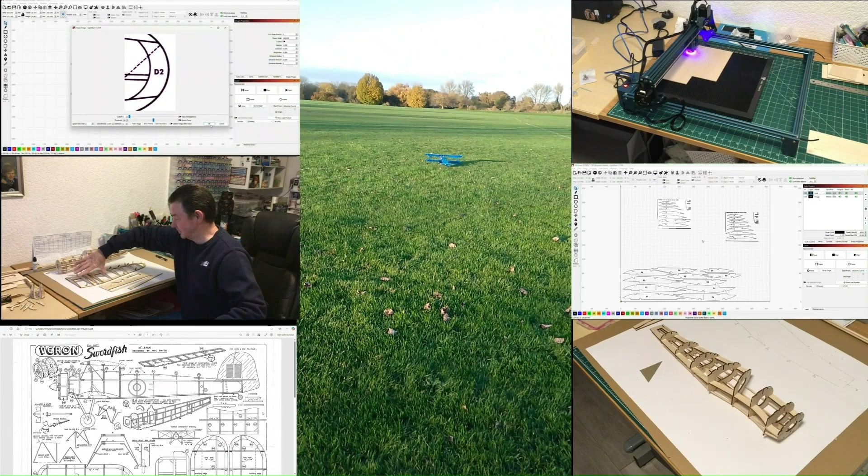Okay, so this is the plan of the Gypsy, the full plan, and you can see the wing here, and that's what we're going to be concentrating on today. Now, in the previous video in this series, we produced all the components for the fuselage, and the majority of those are here on this 1/8 balsa sheet layout. So coming away from that, I've got the formers on a sheet that is 3mm ply.

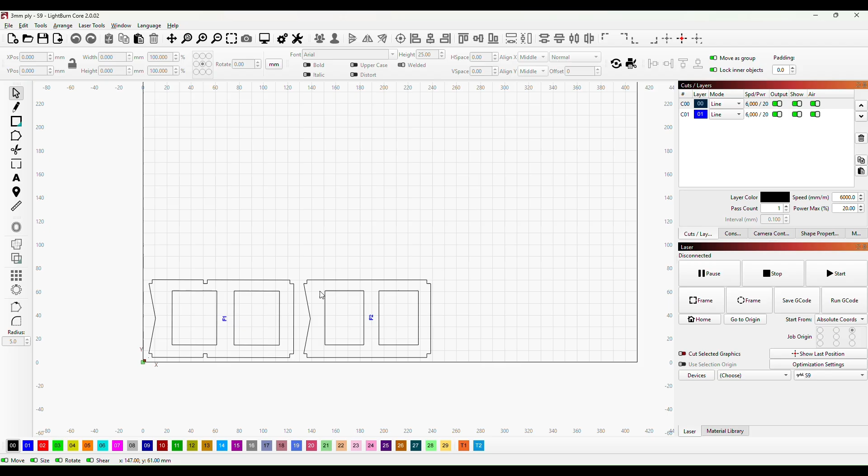Because we're converting to radio control, there'll be a lot of weight inside the aeroplane that was never designed to be in there originally when it was rubber powered, and so I'm making the main formers for the body out of 3mm ply. So if we go back to the main plan,

what we've got is this is the plan, and just to put it into perspective, this square here is the working area for the Sculpfun S9, and I've set it as 400 by 420 millimeters, so it gives you an idea of the size and the scale of the plan that we're working with. Now, one thing to point out is the top of the cabin here, where the wing will sit. You can see that that's flat.

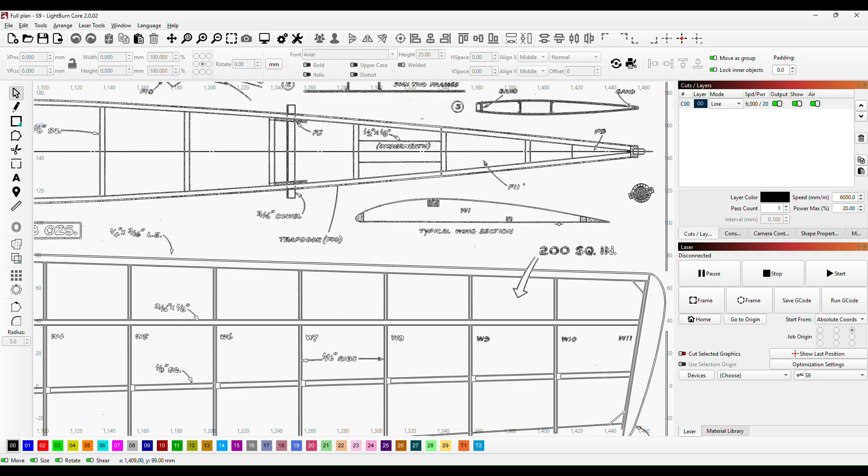Okay, and over here we have a typical wing section, which is the typical wing rib, and you can see that the bottom of that is flat as well. So the wing we're going to be making has got the aerofoil, but with a flat bottom.

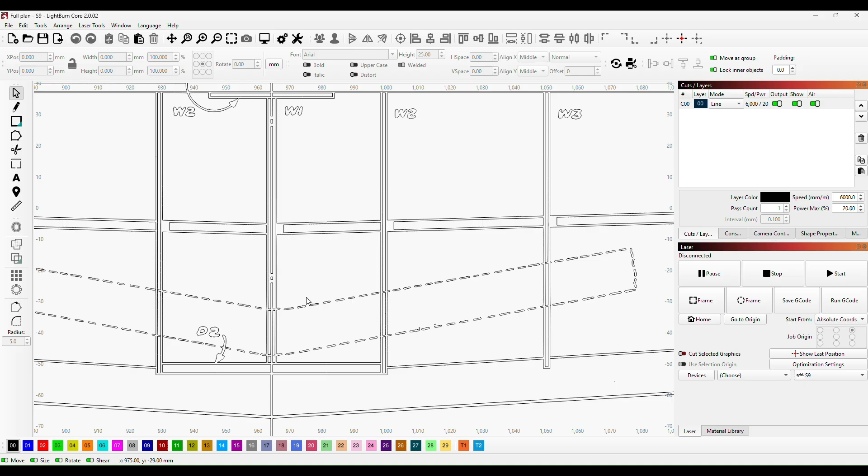So what I'm going to do is use this example here to produce the center two ribs, because you can see there's a rib on either wing, and they'll both be set at a slight angle, and then when they're fastened together, that will provide the dihedral for the center of the wing, and that dihedral is shown with this dotted outline here. So that's the angle that the wing will be set at in the center.

So I'll start by just making the outline of this rib, and I'll make it the right size for the centerpiece, and then we'll be able to work with that rib to make the remaining ribs. And bear in mind, these taper down, so unfortunately on this particular model we're going to have to alter every single rib all the way along the entire length of the wing, but I'll show you how we do that. Okay, so to make this first one, I want to use a line tool.

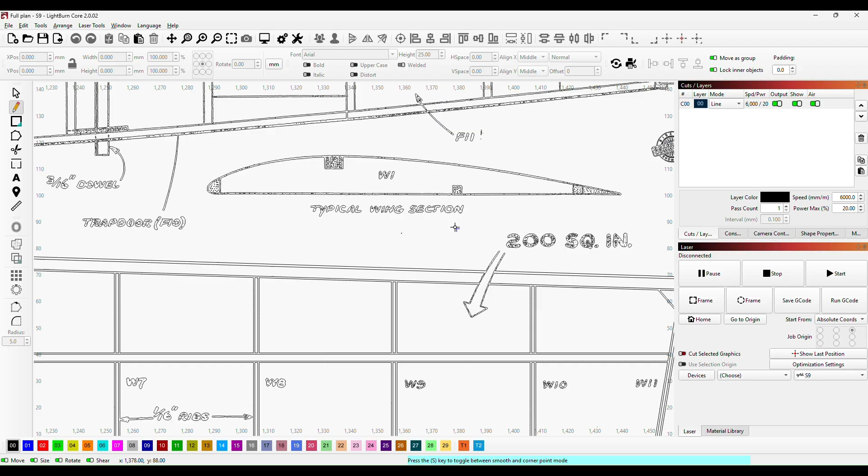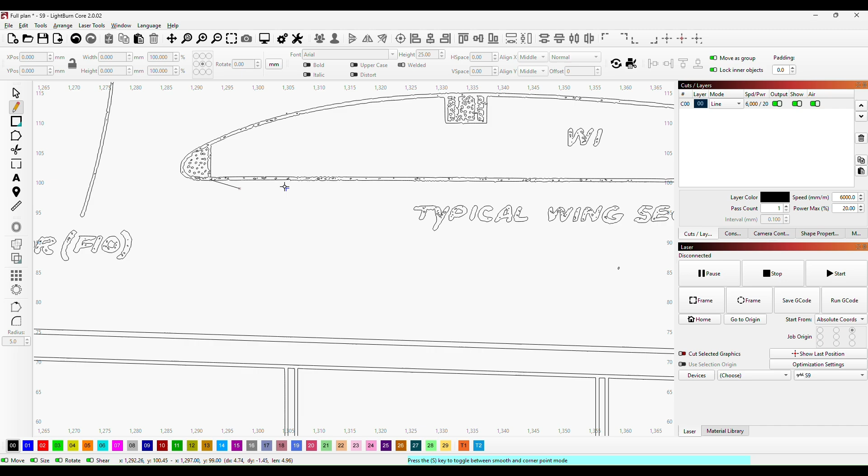I'm not going to trace this rib, because you can see that the outline, when it was originally penned, is very rough. So rather than just copy the outline of the rib, what I'm going to do is draw my way around it. Just like this. I want to come to the inside on this particular one, because this is going to have the dihedral in it, and then coming around the top, all I'm going to do is click in several places around that shape there.

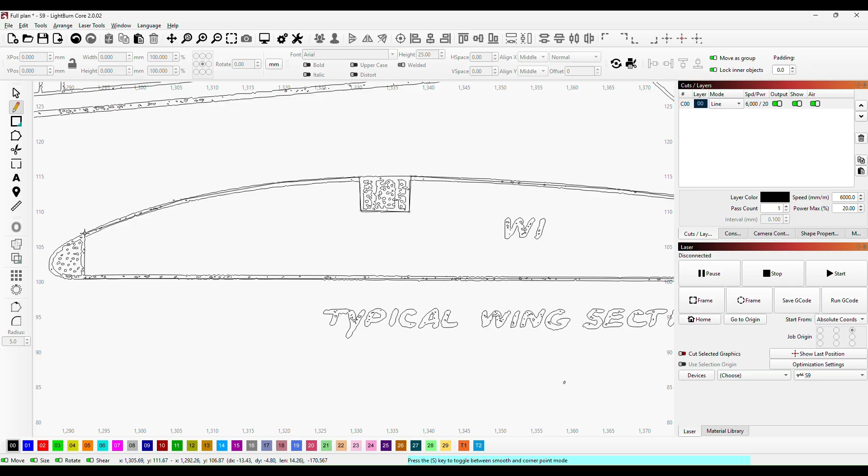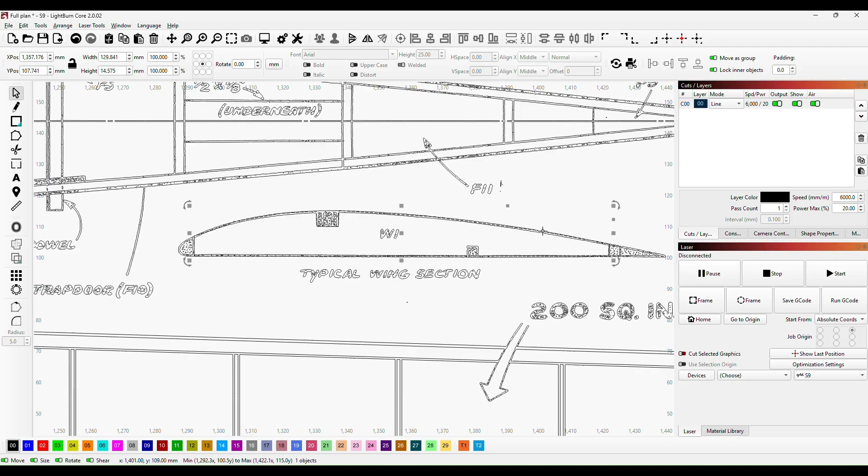Okay, so that's that. Now I've gone straight across this one, but because we've got a flat surface on the bottom there, I thought it would be quite simple for us to insert that later, so we won't worry too much about that. What I'm going to do is I'm just going to change the layer there so that that's a different colour, so that we can see it against the background of the rib that we've got.

If I go to nodes, I can now start to make sure that this shape is absolutely right. So I want that node to be on the outer line. That node is on the outer line. Okay, so if I hover over each of these nodes, because you can see that we don't follow the line properly, so if I hover over this one and press S, you can see that that turns into what's called a smooth curve node, and this corner node here is still set at the original angle pointing straight up.

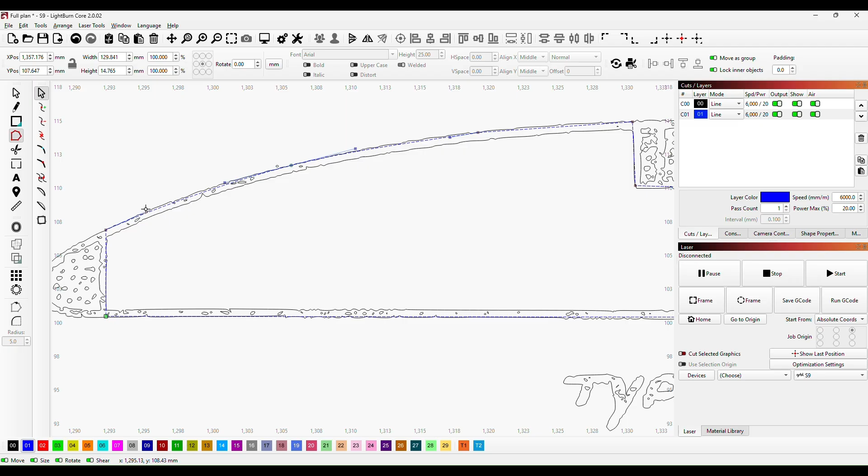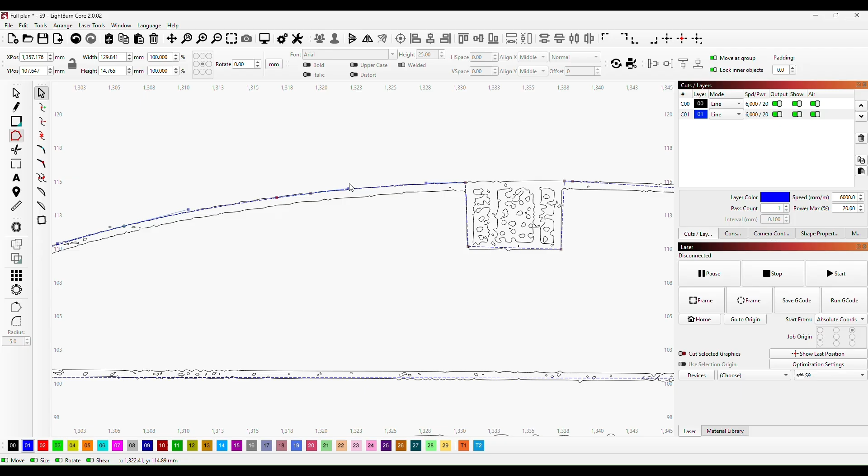So if I just grab this little tab here, what you can see is I can get that to follow that curve around, and then same with this one. Now if I just grab that and drag it out, that will bring it to the line. Okay, so you can see how we're following that line now on there. So if I come to this side and do exactly the same, create a smooth curve node there, and just bring this tab up a little, convert this one to a smooth curve node, and I think that's round about right.

You can see there's a little bit of a wobble on the original drawing here, but I'm not going to alter that because the bottom of our line there is dead straight, dead flat, and the intention on this particular model is that it is flat so that it can sit on the cabin.

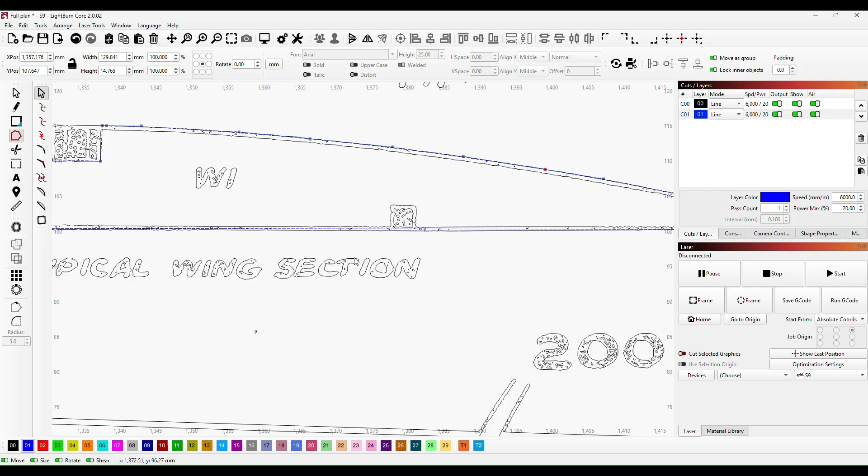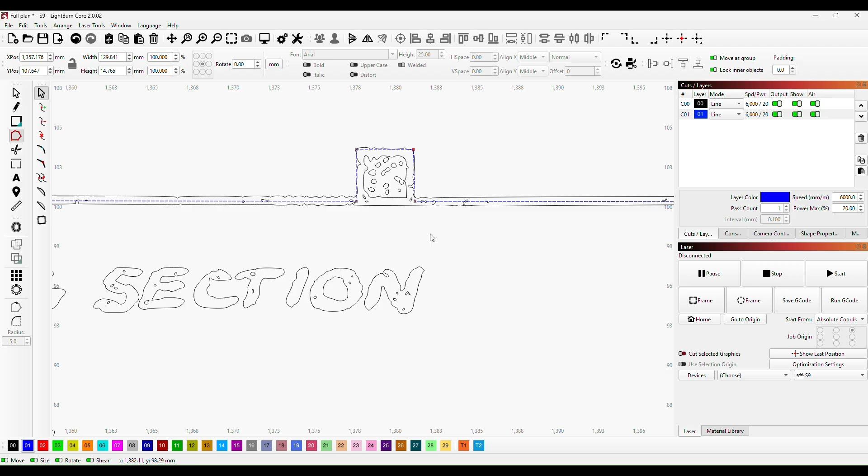What I want to do now is insert this shape here. So all I'm going to do is hover over the line there and press I, and that will insert a node. Hover over the line here, press I, and so I've now got a node at each corner there. Go anywhere in the middle, press I, and bring that up to there. Anywhere on that line and press I, and bring that one to there. I've now got that cut into the right place.

So what I'll do now is I'll bring this across to the main work area for the laser, and we'll carry on working on it. But before I do that, I just want to point out that the end of this rib here has got a flat end, because what the designer wanted when this was first designed, which was in 1947, he wanted this to be a flat piece sanded down and made into a rounded leading edge.

What you'll find on modern designs now is that this will be a square, and the end will be a point which you can easily sand, and you'll have what's like a bird's mouth in the end of this rib. And what I'm going to do is I'm going to put a bird's mouth into this rib, so that we can accommodate the modern way of doing this by having a piece of square balsa running along the front of the wing.

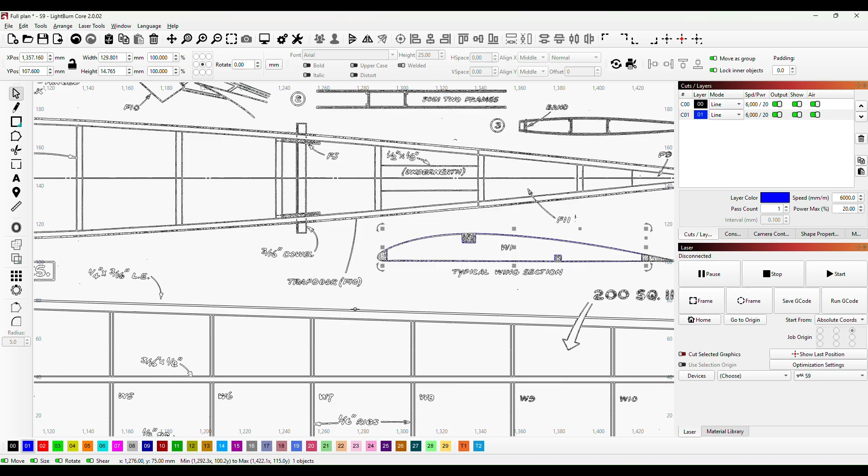So what I'm going to do is just quickly measure this, and what we'll find is this is 4.86 millimeters. So I'm going to take this over to the workspace, just like that, and then I'll come off this layer now and I'll make it into our cutting layer, which is 00.

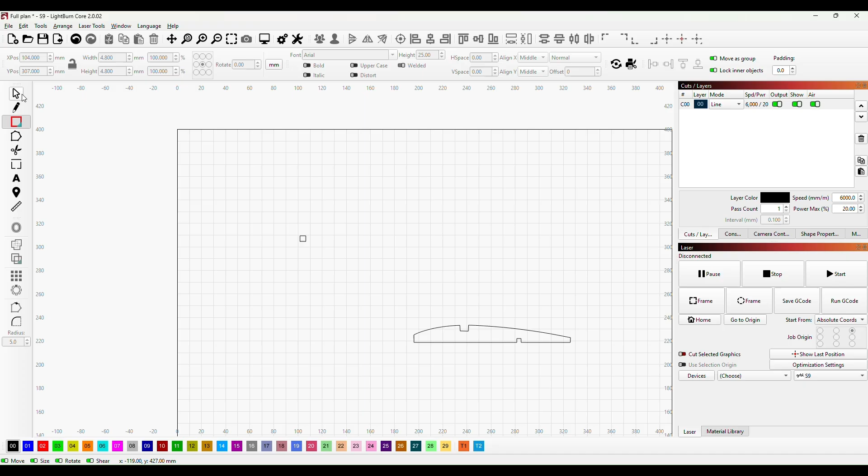Now instead of having that flat piece on the end of all of the ribs with the rounded leading edge, I'm going to put a piece of balsa in, which is square in section, with the point leading forward, and I'll show you what I mean. So if I make a square here, which would represent a cross section of a piece of balsa, and I'm going to make that 4.8 millimeters square, just by altering these numbers up here, and then that would be representative of a 3/16 piece of balsa coming right across the front of the aeroplane.

Now if I turn that to around 45 degrees, we can now align that and make sure that that's exactly level by going to nodes, hovering over one of the edges and pressing A, and that then will make sure that that is now level through those points.

Because if you do that, when you go to nodes, hover over one of the edges and press A, it will go to the nearest, either horizontal, vertical, or at 45 degrees, whichever it's nearest to, it will snap to that. So if I then bring that over, and all I want to do is put the point of that into the center of our wing rib there, and then all I'm going to do is go back to nodes, and I'm just going to extend this along until it reaches the point there, and then I'm going to just adjust this slightly so it comes down to this point here.

And by doing that, what we'll do is we will key in a leading edge, and it will make the whole front edge of the wing much stronger. So with that in mind, if I just hover over, press I, that will insert a node, and I can bring that to that point there. So the bottom will remain flat. On the top, if I insert another node here, and then what we need to do is just bring that to the edge, and then if I just bring these nodes out until we get a nice sensible looking shape, just like that.

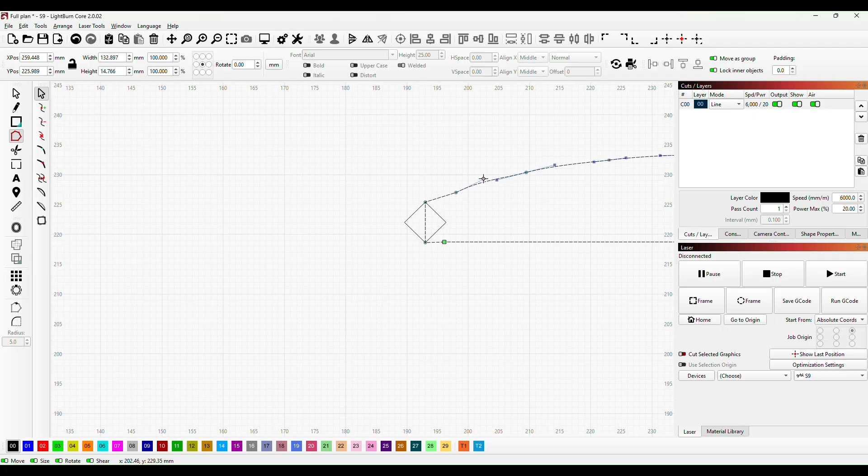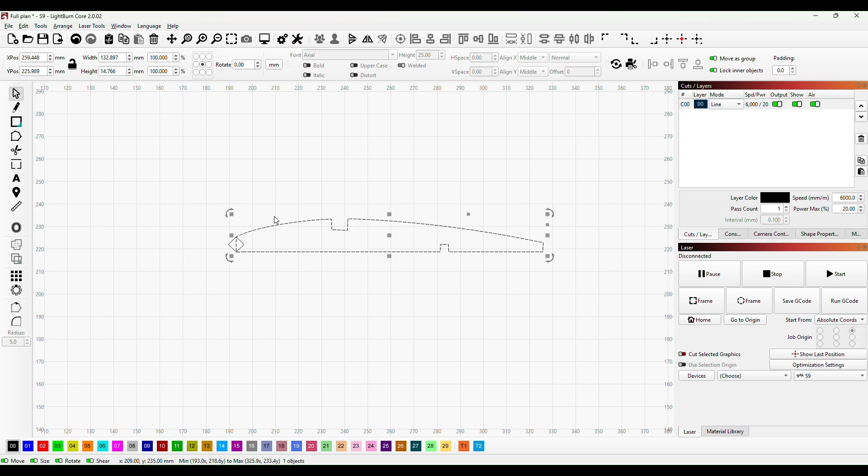We just need a little more there. If I select both of these nodes and then press Control and Shift, I can just raise them up slightly until we get a nicer shape there. Let's just take a look at that and see what that looks like. Okay, not too bad. That looks quite nice. So all we've done is we've strengthened this front end up a little bit. We're going to key in our leading edge, and that will make a much stronger wing. And the reason for doing this, of course, is because with us adding our electronics and converting it to radio, it will be a little heavier, so we want to just beef it up a little bit.

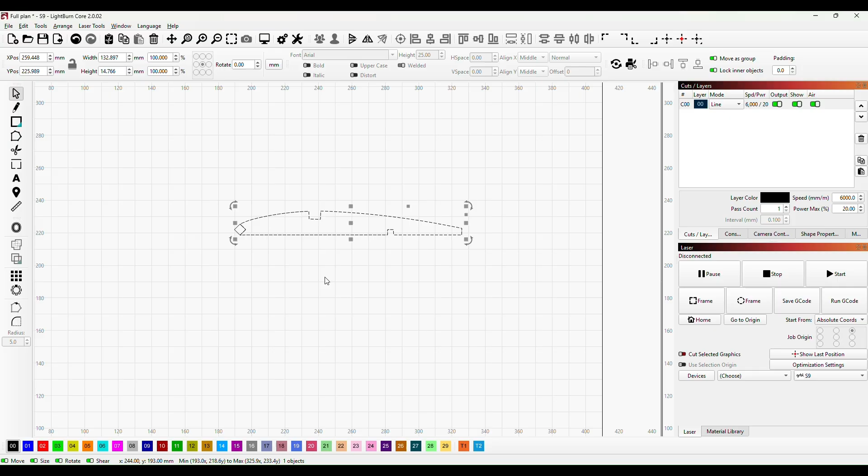Okay, so if I go back to nodes, and all I want to do is go into the center, anywhere in the middle, press I to insert a node and bring it back to that point there. Now what we'll be able to do with this is assemble this and just sand down the front, and that will give us a nice round leading edge. Okay, so the next thing to do with this rib, I'll just remove this. Next thing to do with this rib is to just check these two shapes.

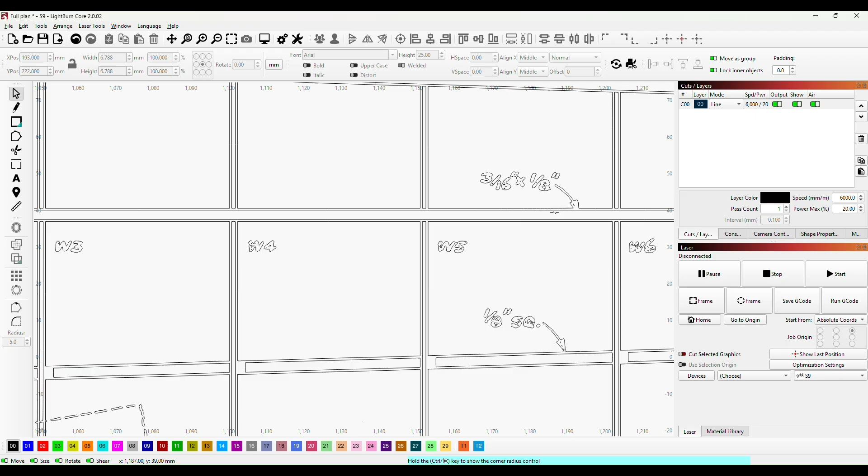Now if we come across and scroll right in, we can see that that is a 3/16 by 1/8 spar, so it's 1/8 across, or 3.2 millimeters across, and it's 4.8mm deep. Now these here, D1, so there's one of those either side, they are made of 1/16 balsa. We will make those out of 1/16 ply, just to give us a bit of extra strength in the middle. But we've got a 16th either side, so in essence we've got an 1/8 and a 16th and a 16th, so it's a quarter, which is going to be 6.4mm. So it's 6.4mm across by 4.8mm deep. That's what this shape here is.

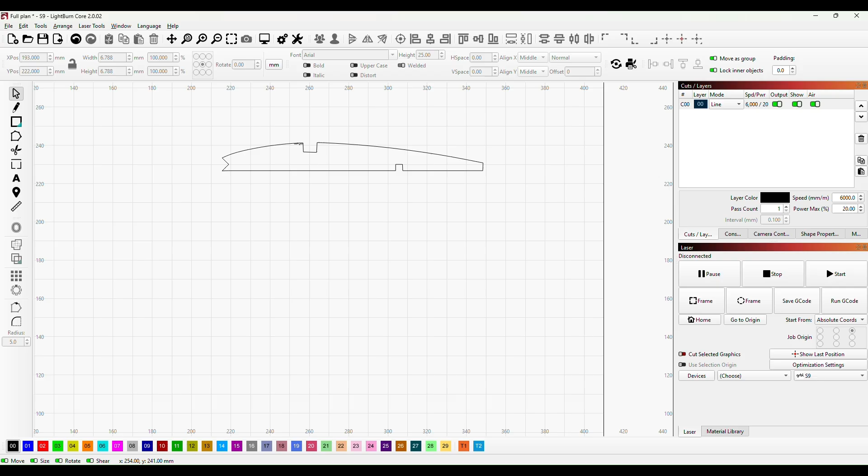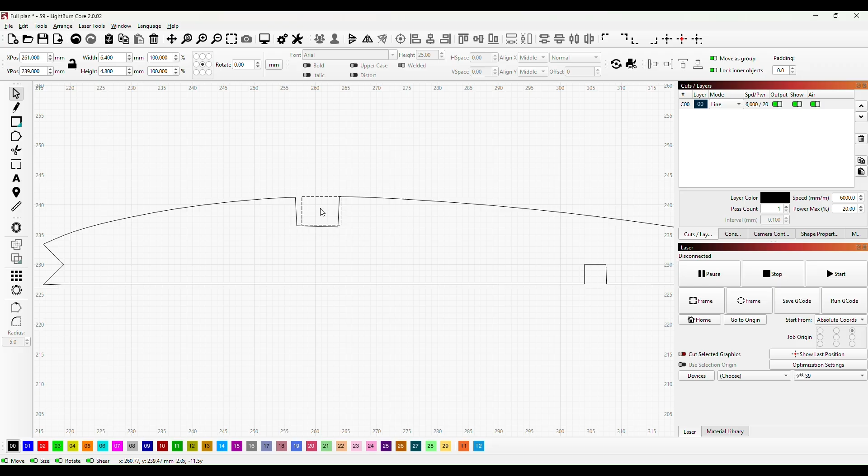So what I want to do, you can see just by looking that the way it was drawn out and the way we've copied the drawing isn't quite square and as we'd like it. So just make a quick shape, and I want that to be 6.4 wide and 4.8 deep. And then when I bring that down and center that, so if I press Control and Shift, I just want to get these two top corners in alignment here and centered on these two top corners.

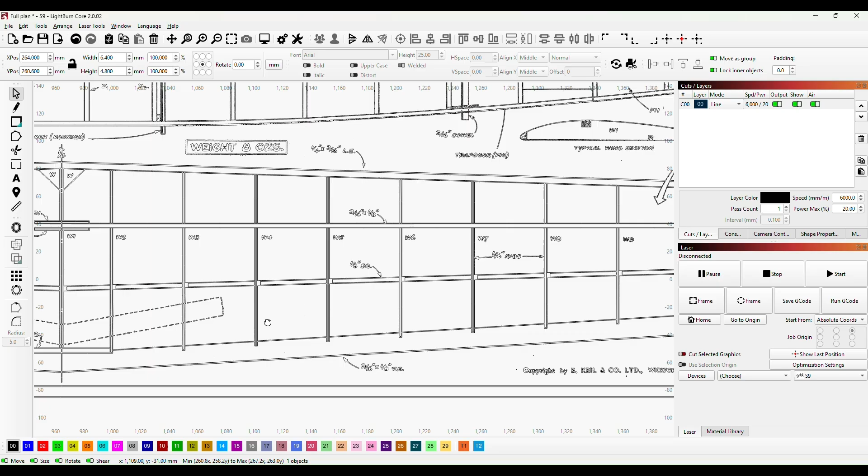And if we go back to our nodes, all I want to do is snap these into place, just like that, and then we know that that is going to fit absolutely perfectly when we make our components up, and it's now nice and square. So this one here is 1/8 balsa, that's spar, 1/8 square. So all we want to do is come back and we'll convert this now to 3.2 by 3.2.

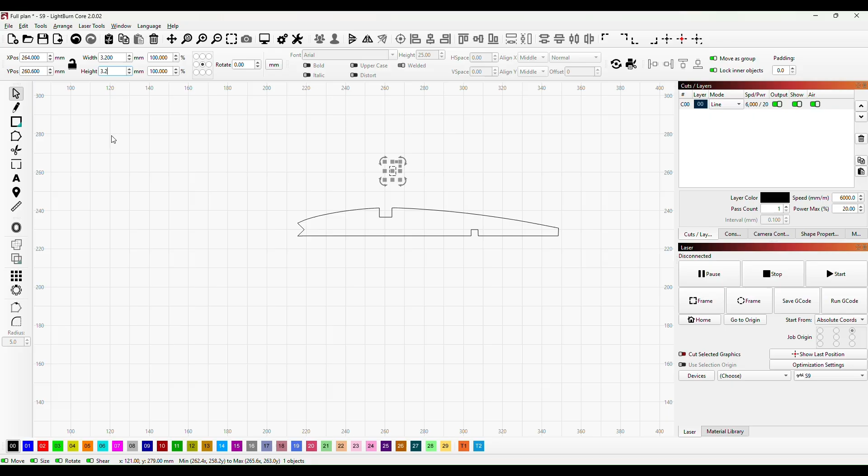Like such, and then we'll bring that down and then place it just as we did before. And all I want to do is get these two bottom corners in alignment with these two bottom corners and in the middle of them. So 1/10 of a millimetre is making a big move there.

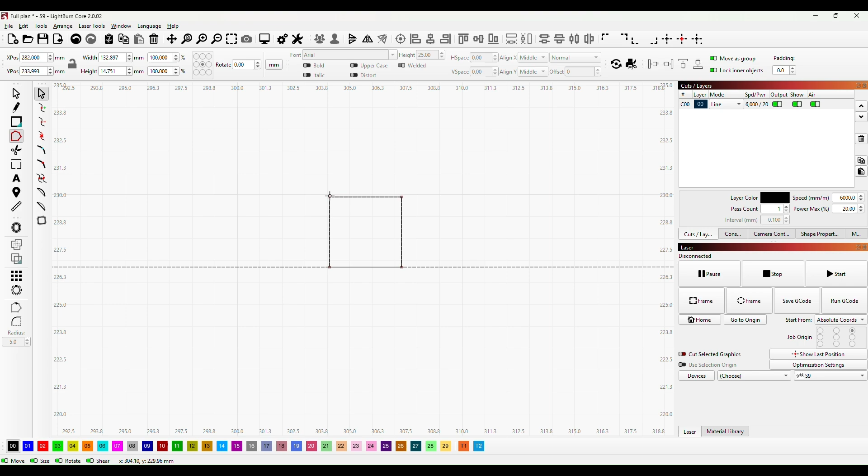But right, and so then back to nodes, and all I want to do is snap these nodes onto the corner, and you'll see that that is now a perfect fit. So with that done, we now know that this is perfect for that central rib on the wing. So I just turn that round,

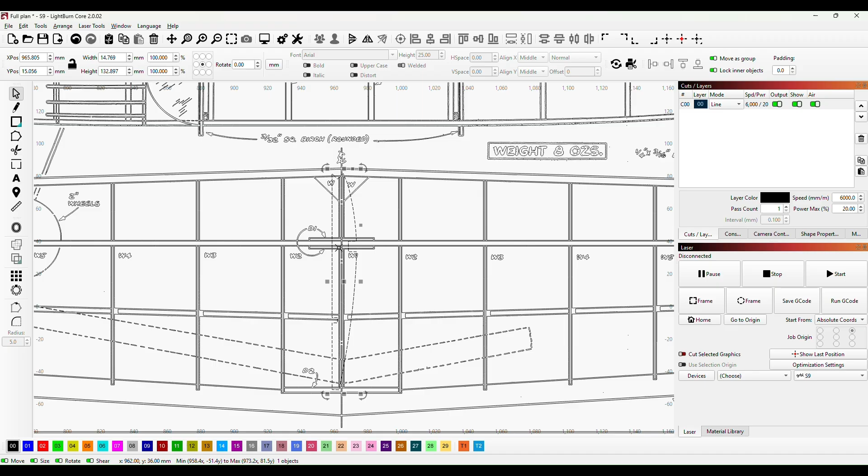and then what I'll do is I'll go to nodes, hover over this one here, and then I'll press A. So that's now upright. What I'll do is I'll just bring this across and we'll just check that it is going to be a good fit. And the way we'll do that is we'll get this bird's mouth here right on that leading edge. And we can see when we do that, that the bottom edge is in alignment with the bottom. Okay, so that's now the correct size and it's all lined up, everything there looks good with that rib.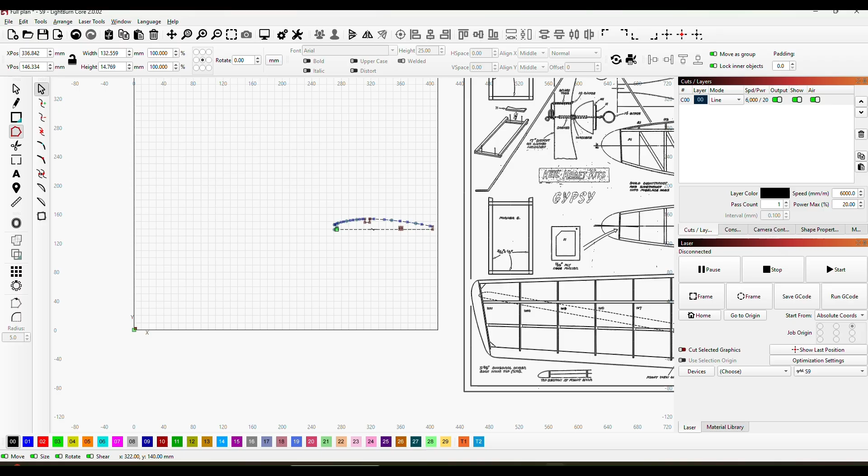The one thing that I do think we're missing here is that we've got a trailing edge here that's 9/16 by 1/8, and when we look at our rib, if we bring our rib over here and we'll turn it round and we'll just align that in the same way, we'll go to nodes, hover over this bottom line, press A, and now that's perfectly level.

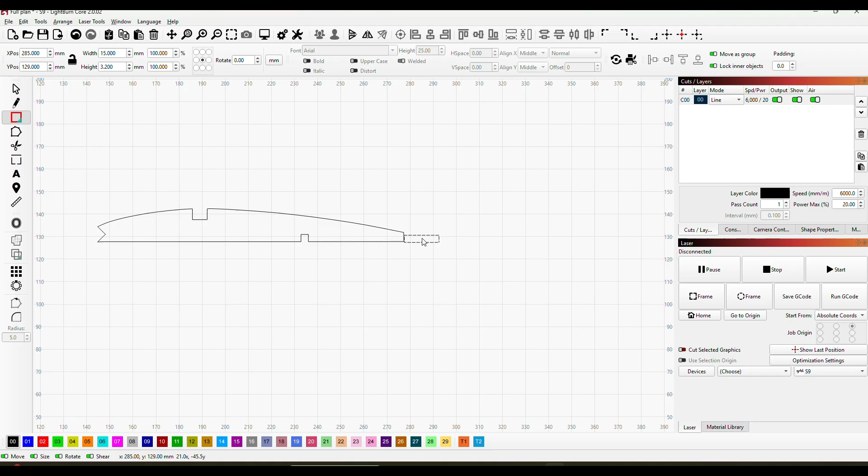The one thing I'm conscious of is that this back edge here is around 4mm high. If you have a look at that, that's 4.09mm. So our trailing edge is going to be 3.2 high, and close to 15mm long, or 15mm wide. And if we bring that to the back edge, which is where it would be, level with that bottom, and I'll just press Control and Shift and then use my arrow keys to bring that in and get that bottom edge perfectly lined up.

You can see that we've got a step here. So bearing in mind that there's going to be the dihedral shape in there as well, but nevertheless we've still got this step. So what I want to do with that is I want to go to nodes, and I'm going to insert a node right on that corner, and then insert another node. In fact, I could insert one down here, to be fair, and then it just makes it a bit easier. Just bring that along until that top shape looks nice and smooth, and then bring that up to there.

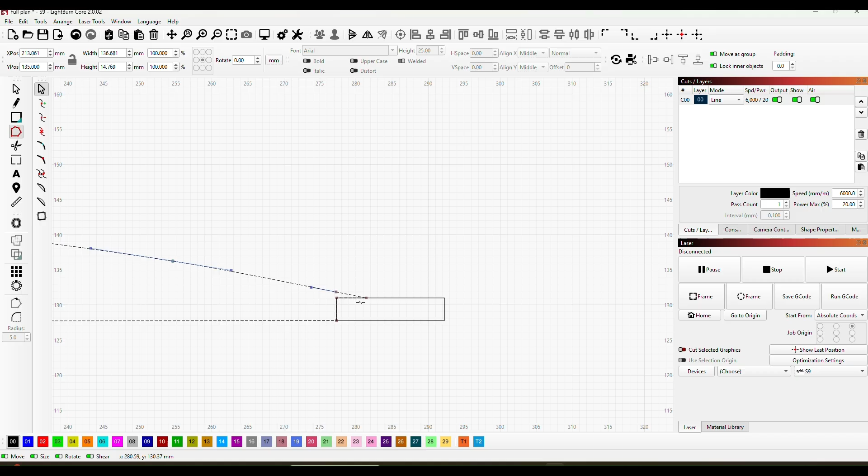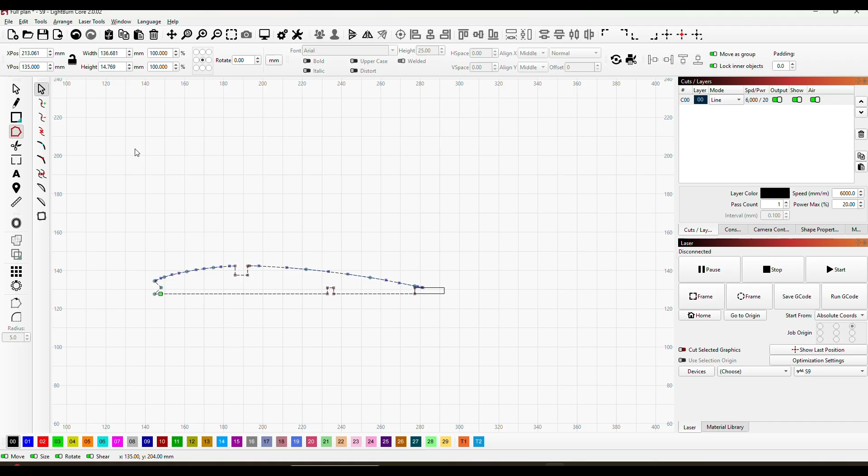And then what we'll find is, instead of having a step, the rib will come down and nicely blend onto our trailing edge. And I'll just change that to a smooth curve node, and there we go. So of course the trailing edge will be tapered down as well. We'll either use a stock trailing edge, or we'll sand this corner away. So our rib now is completely finished, and it's also got that little step at the back there, so it'll sit nicely on the trailing edge.

So the next thing to do is to start making the rest of the ribs, and the way I want to do that is if I make a copy of this one, Control C, Control V, and I'll bring that copy over, and all I'm going to do is turn it upright, and then if I go to nodes, hover over this edge and press A, now I know that that is perfectly vertical. Then I can bring that to where

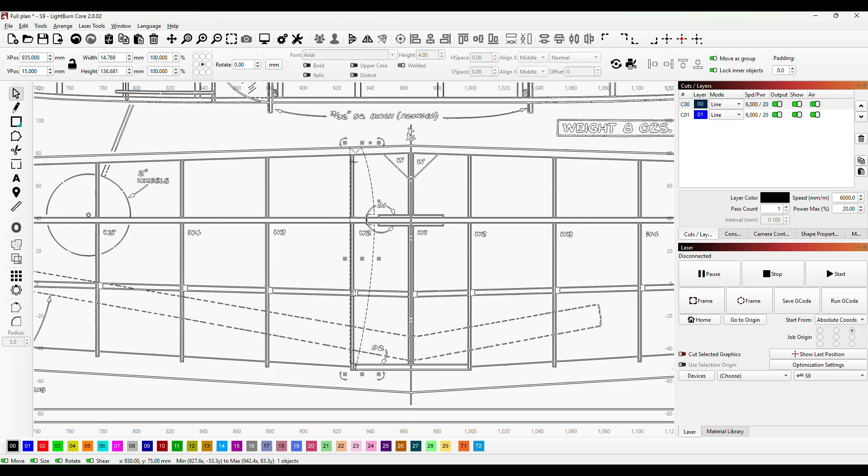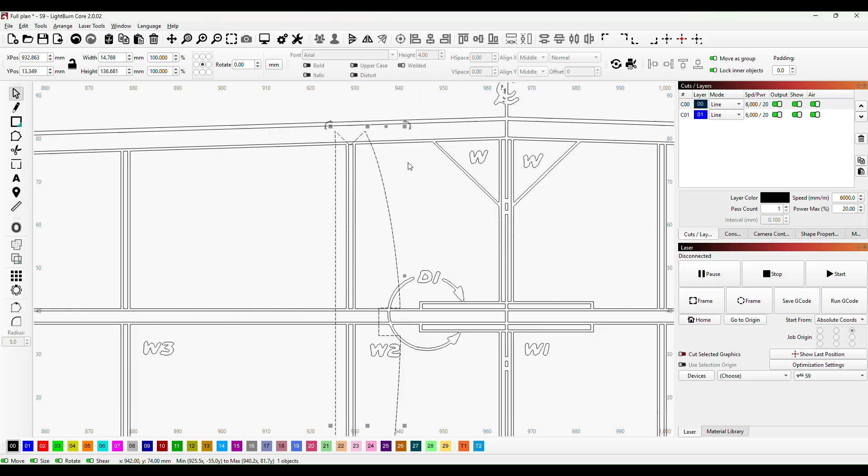W2 is. Now all I'm going to do is get this bird's mouth here to be on this inner bottom line here, right in the center of this rib here. So just bring it over, get it reasonably close, and then by pressing Control and the Shift key, I can use the arrow direction keys to just move that 1/10 of a millimeter at a time. I'm now confident that that's in the right place. So all I'm going to do is come down to the bottom now, and I'm going to move this until that is where I think it is in the correct place.

And interestingly enough, because the wing tapers both top and bottom, obviously it's come back this way, so this one, W2, looks like it'll be in about the right position. So I think that is the right length for this particular rib.

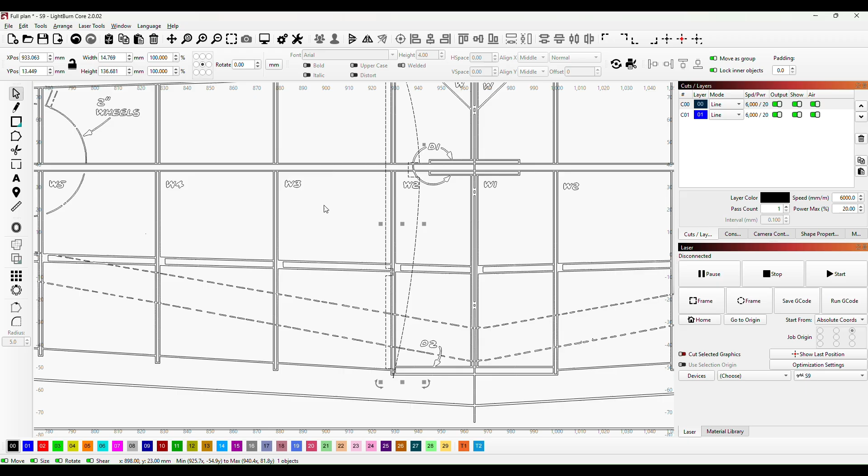So the next thing is, I've got over here two small shapes. Now one of them is 3.2 by 4.8, which is the cross-sectional size of this top spar, and the other one is 3.2 by 3.2, which is the cross-sectional size of this bottom spar. So all I'm going to do is bring those across, bring that one over, and I'm going to use that as the template in here.

And all I want to do is line this particular shape into the center of this spar, level with these two corners here, level with this corner here, or level with these corners, but it may not be touching on some of the later ones, but you'll see what I mean in just a minute. So get it near enough where I want it, and then I'll go to Control and Shift, and then I'll just move that into position. Now I think that's about right where we are there.

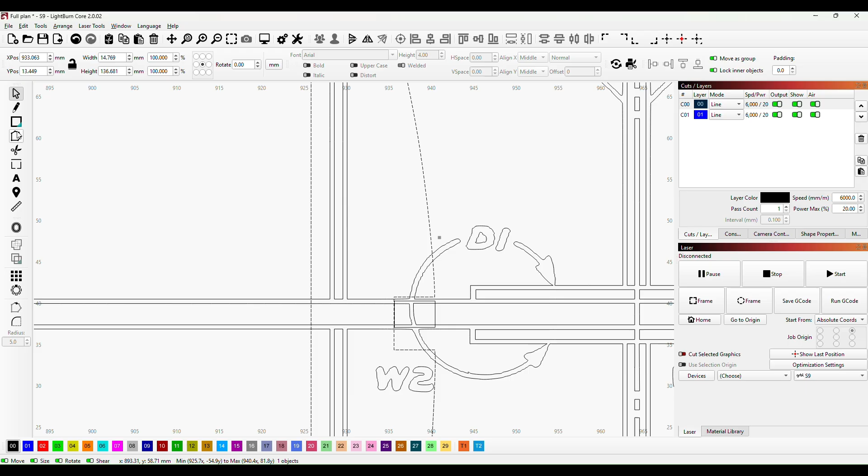So you can see that we're in the center of this spar, and we're level with this top edge. So all I'm going to do is go to nodes, and then I'll bring this node to that corner there, this one to that corner, and when you approach the corner they snap into place, and that's all I'm going to do. I now know that that slot will be exactly in line with that spar.

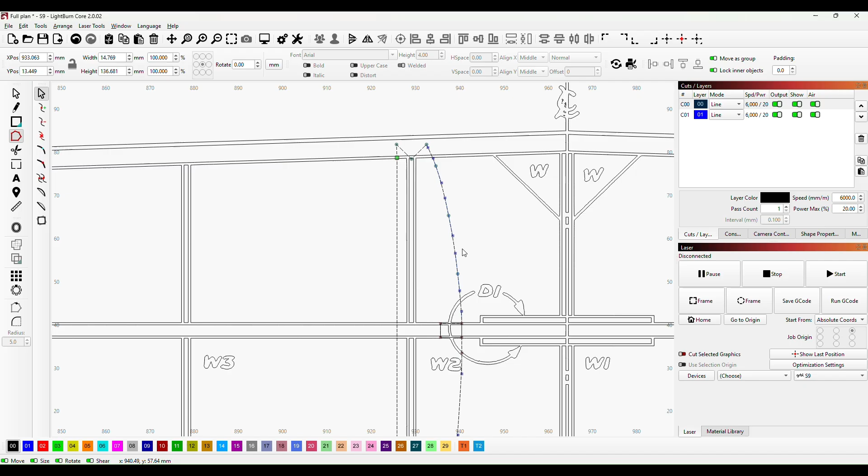So next thing to do is bring the 3.2mm shape over, and then I'm going to do exactly the same with this. I'm going to line it up with the center of this spar, and also try to align it with this edge here. So Control Shift, and then moving it 1/10 of a millimeter at a time. I think that's about the right position there.

Okay, so if we go to nodes, all I'm going to do is move this node to that corner, this node to that corner, and then when we come off nodes, I'll just bring these two shapes out of here, and I'll just park them next to W3 because that's going to be the next one that I do. So I'll just park them there. Okay, so that shape is now complete.

So if I just bring that round, then what I'm going to do is make a copy of that, because the copy of this is what I will use for the next rib. So if I Control C, Control V, I've now got an exact copy of that, and now I can label this one up W2. If I come off that and I change that to the engraving layer, which I'm going to use 01 as our engraving layer, so the laser won't cut through that. All it will do is write W2 on the component.

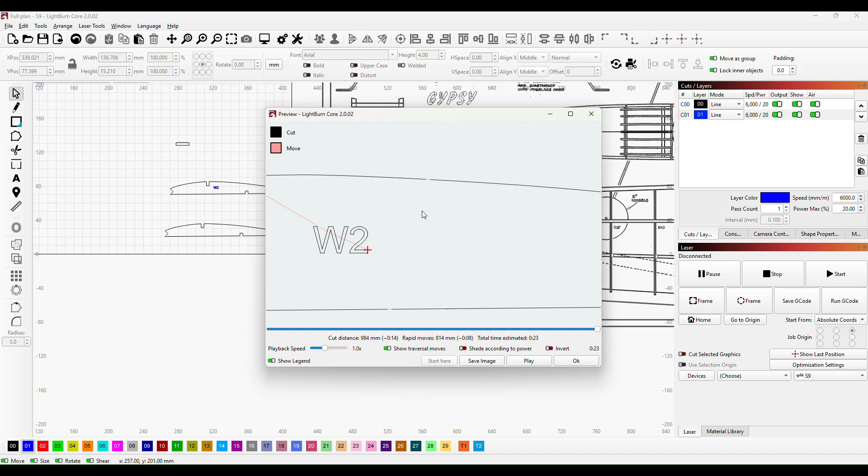And I can show you that if we just have a quick look at the preview. If we scroll right in, you can see the little gap there, and then if we move down you can see the little gap at the bottom there. Okay, so that's the preview, that's what the tabs do.

So if I move this across, I can also label up the first one. Now the first one is going to be W1, of course. W1. So if I then group W1 and then add in the tabs, one at the top and one at the bottom, and so I've got W1 and W2.

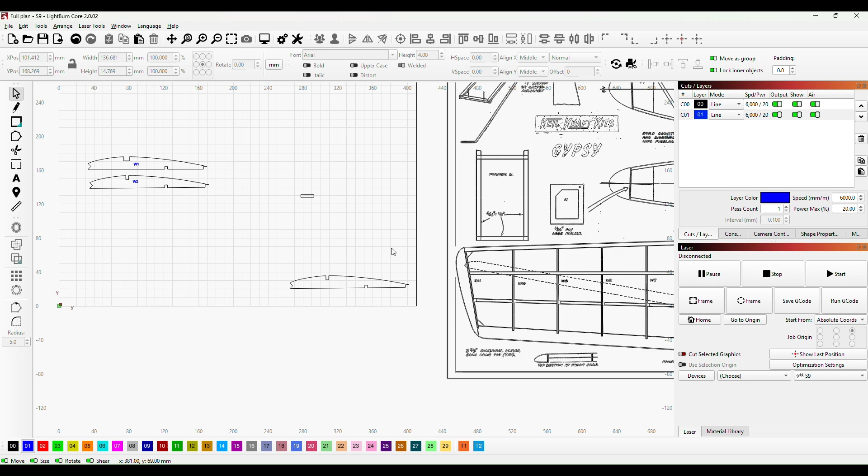So I want to carry on with that process now, but there's one other thing that I wanted to show. We didn't actually resize that one very much, because with the taper and this one, W1, being slightly shorter, it meant that when we moved this rib down, it actually matched up quite well at the bottom.

But the next one we are going to have to resize. Now, something to just look at is where the dihedral is shown in this dotted line. If you follow that dihedral all the way up to the wingtip, you can see the wing itself is tapering not only in its chord, but it's also tapering in its thickness. So what we need to do as we shrink these ribs down to make the next ribs is we need to make sure that we're taking something from the thickness as well as from the length.

So if we do exactly the same thing with this rib here, I'll tip it on its side, I'll go to nodes, I'll hover over and I'll press A so that it's perfectly vertical. And then all I'm going to do with this is move it into position over W3 in exactly the same way as we have done with the others. If you just press Control and your arrow keys, by the way, it will move 1 millimeter at a time. So if you've got a way to go, that is a good way to do it.

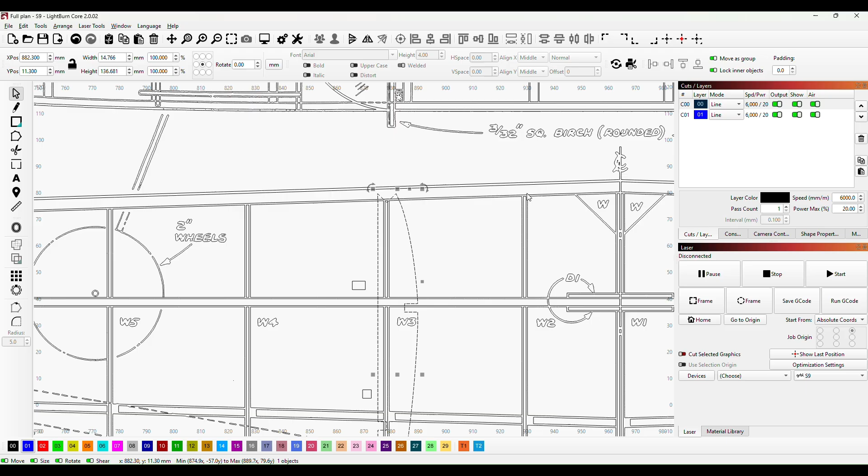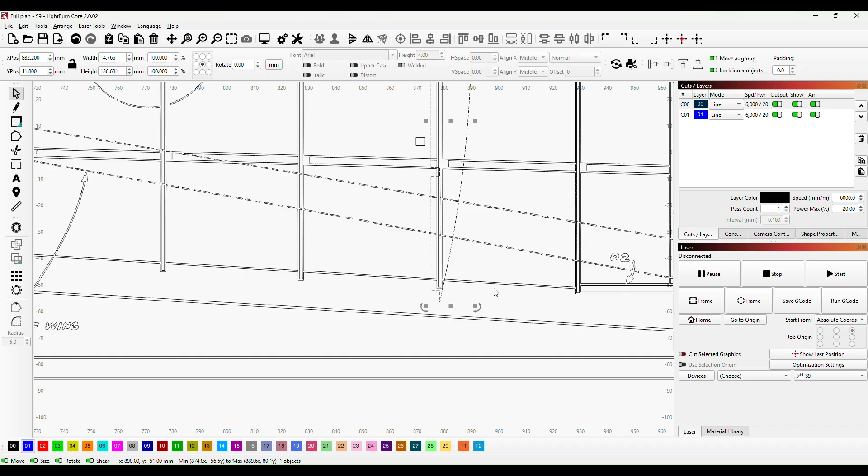So I'll just come a little bit closer in so that we can see exactly where we are, and I want that V to be right on, and I'm happy with that. Now if we come to the bottom, what we'll find is we're now over, so I want this edge here to be level with the center of the edge of this trailing edge here, because I don't intend to cut slots in the trailing edge. I'm going to use our little lip there as a means of keying in, so to speak.

And all I'm going to do is go to one of these corner markers here and get the arrows to go diagonal, and what this means is that when I drag that inwards, it will reduce the size of this rib, but it will reduce it proportionally. So the length will get shorter, but also the thickness will get shorter as well. So all I'm going to do is bring that in until that point there is level with this trailing edge, and I think that's about right there.

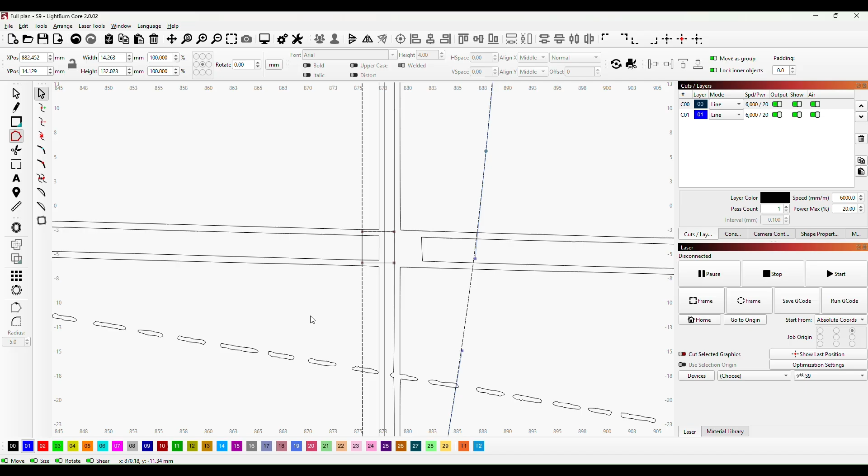And then what I can do is I can now bring our shape in, and I'm going to put that exactly where the last one was. So if I get to the center of the spar, and then level with this edge, and then all I need to do is click on our rib, go to nodes, and just shift those two nodes there up, just like that, and then move these until they snap in. Just like that. And I now know that that cut-in is exactly in line with this spar here.

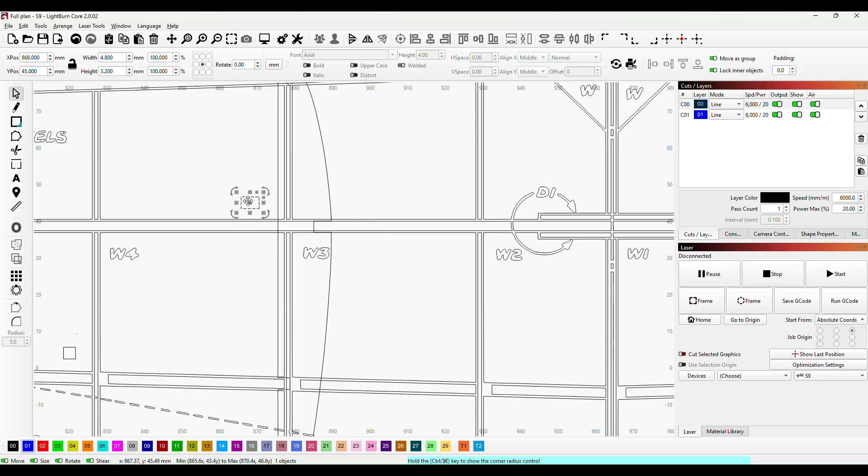So I can just shift that shape out, and all I'm going to do is park that next to W4, just the same as we did before. And then I can bring this shape in, and all I want to do is get it into the center of these two lines for the spar and level with this top edge here. So if I press Control and Shift, I can just move that along.

And the thing to bear in mind, you can see there that we are fractionally over the top of the rib, and if we move 1/10 of a millimeter in, we are inside the rib. So you can't always get it spot on, but what you've got to bear in mind is we're now talking about 1/20 of a millimetre, or 5/100ths of a millimetre. I think that is closer than the other side. So all I'm going to do now is go to nodes and just snap this onto the corners just like that.

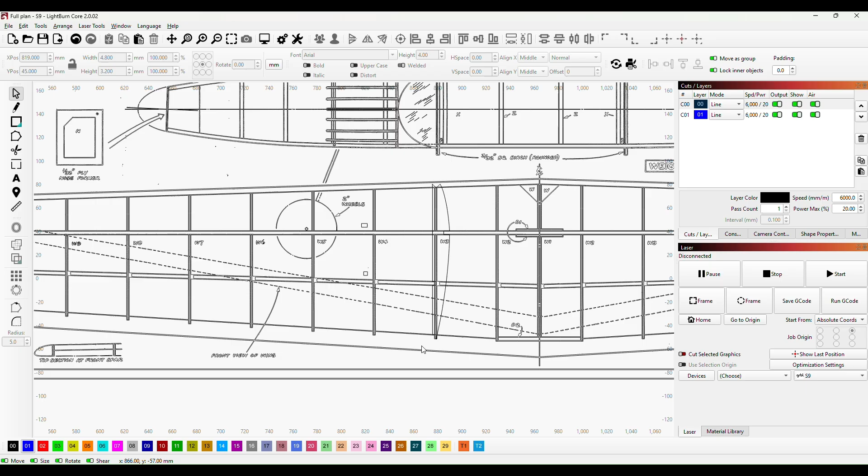And I know now that that rib, or that spar, will fit perfectly into that rib. So I'll just move this shape and I'll park it next to W4. Okay, now I'm going to carry on that process until I make all of these ribs, using the corner to shrink it proportionally. What we'll do when we end up at this last rib here, W10, is we will end up with a rib that is this size but proportionally thinner than this rib up here. So we'll get this nice taper that we've got on these dotted lines here.

And once I've done that, I won't go through the whole process now and show you that. What I'll do is I'll quickly make those up and I'll show you them all in line, and then we'll concentrate on this final rib here, which is at an angle. Okay, I'll show you that in just a minute.

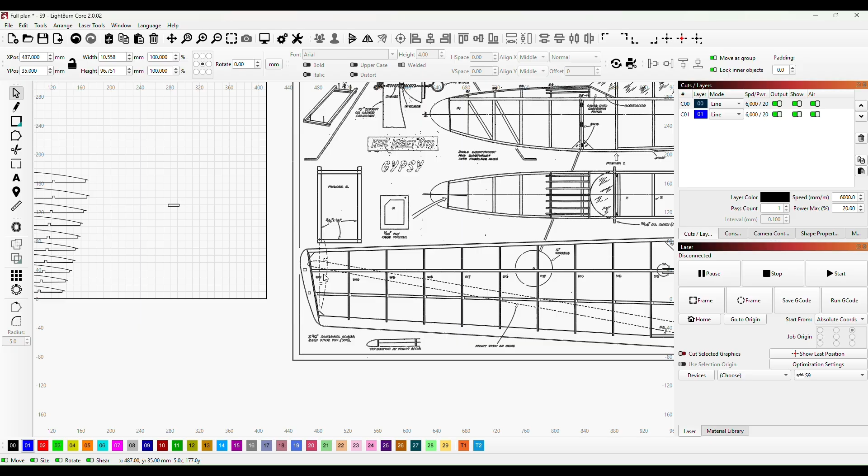Okay, so that's all of the ribs made up. We've just got this last one to do. So all we'll do is more or less the same, except this time we're going to have to turn this so that it matches the angle of that rib at the end, in order to make sure that we're going to get our length exactly right. So all I'm going to do is move that into position, and we now have to just shorten this by a very small amount. There we go.

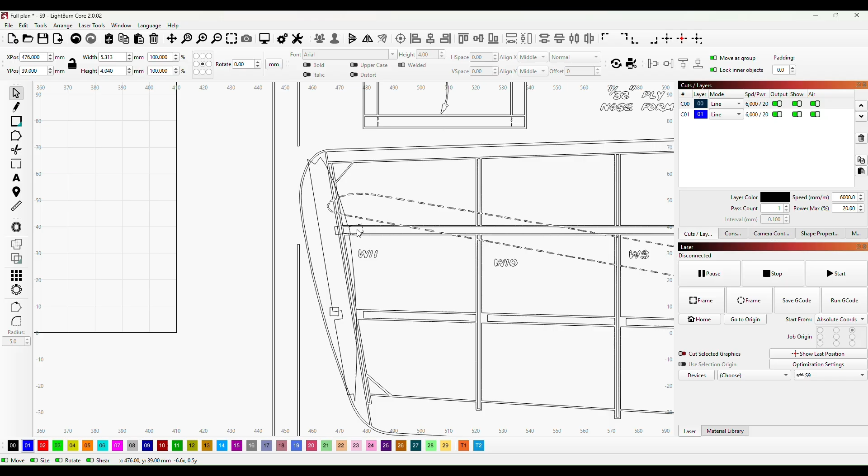We can now bring our shape over and line that up. Now what I want to do with this shape is I want to get the top of this in the centre of the spar. And I want to get the edge of this aligned at the same angle as the original. So I think if we use that as our template, I think we'll be in exactly the right place.

So I'll go to nodes. All I'm going to do is shift those nodes to the corner of the shape, and I think we'll be absolutely fine right there. And in exactly the same way, I'm going to move this rib until the slot at the bottom is over where the rib would be. I'm going to turn this so that it's at the same angle as the original slot was.

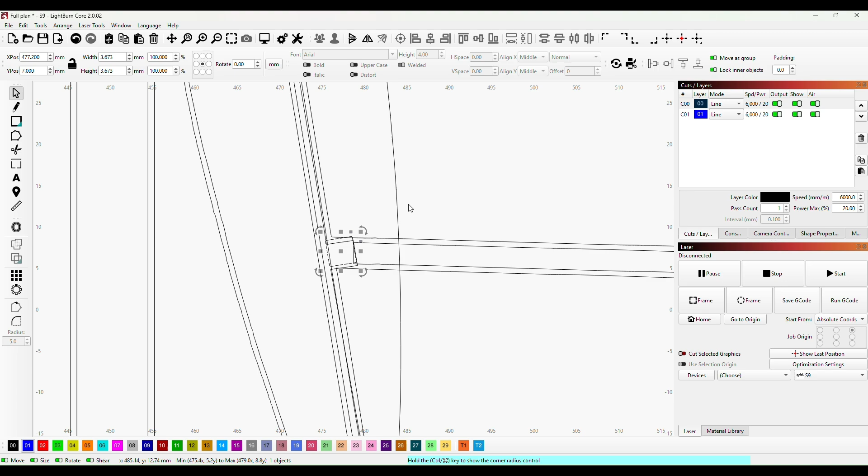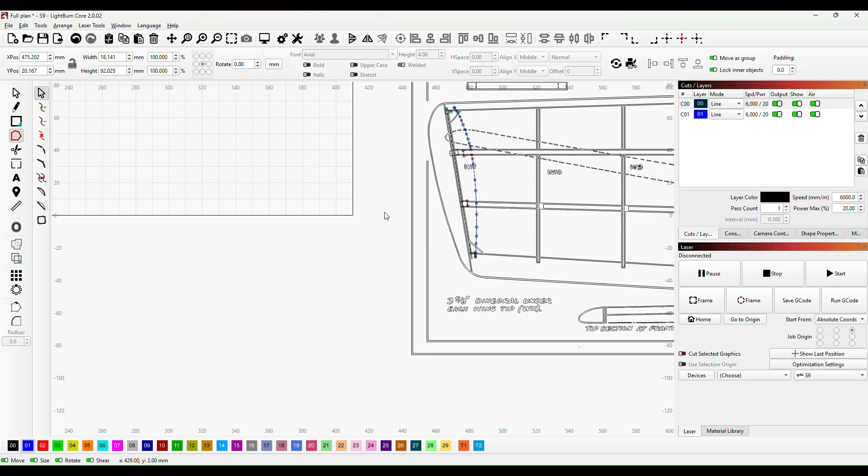There we are. And now if I get this end so that it's on the centre of this spar, I'm sure that that will be absolutely spot on. I think that's where we want it, about there. Okay. So go to nodes, and all I'm going to do is move these nodes to the corners in exactly the same way as we have been doing. I think that's our final rib completed.

So if I bring that out of there, bring these two shapes down as well, move them out the way. In fact, we're finished with those now, so they can go. And this is our W11. So with that labelled up and in place here, all I need to do now is copy all of those, Control C, then Control V, and that's all of the ribs made for both wings.

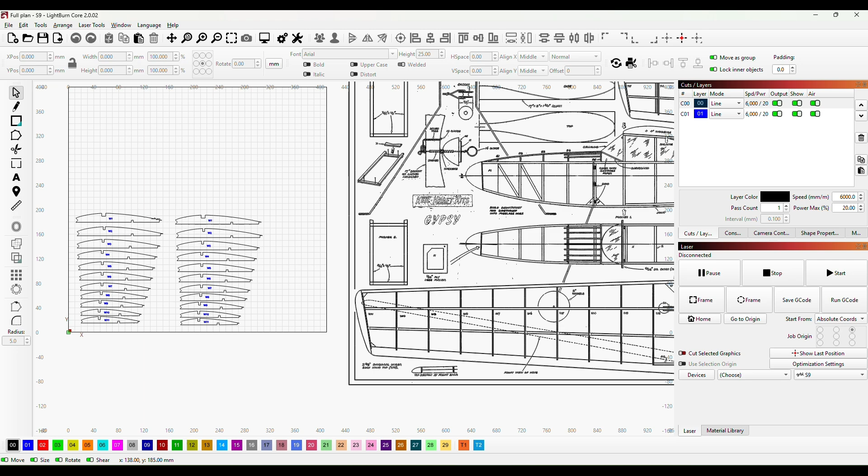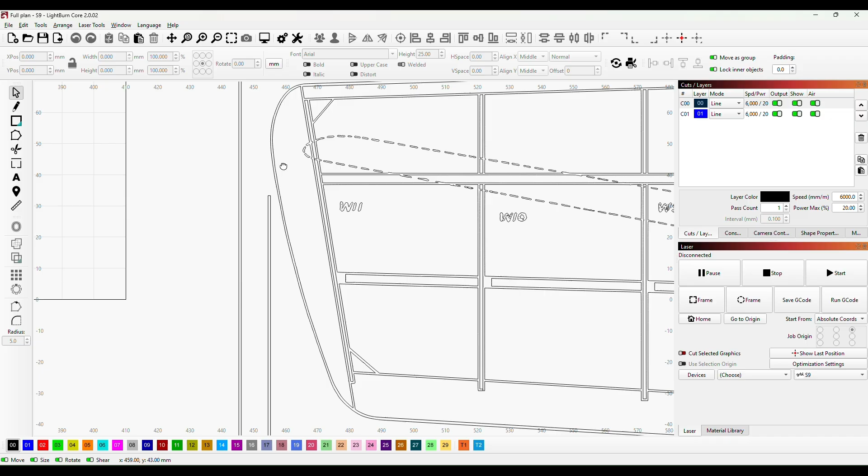Okay, so with all of the ribs made for both wings now, the next thing to do is produce these wing tips. Now I'm going to make these in 3/16 balsa, and they'll be sanded down to this profile here. So very straightforward. All I'm going to do is use the line tool, and I'm going to start up here, and I'll go to this outside line, start there, come all the way down, and then all I'm going to do is move along, click in a number of places, and then we'll convert those to smooth curved nodes and we'll get a perfect shape.

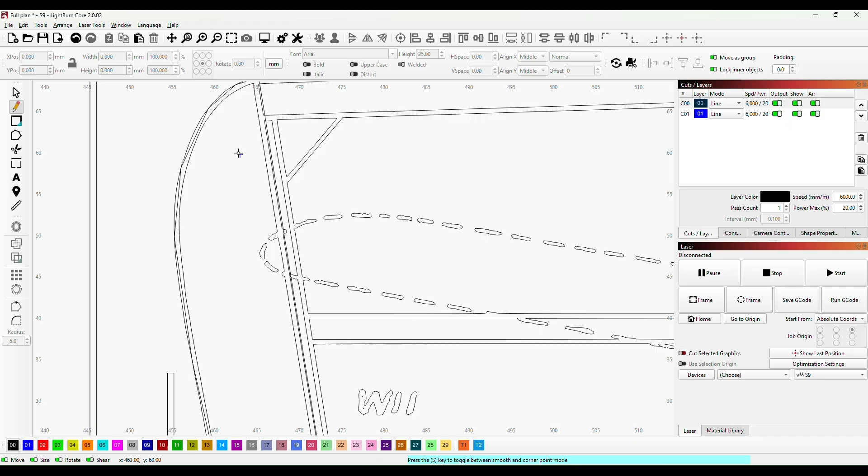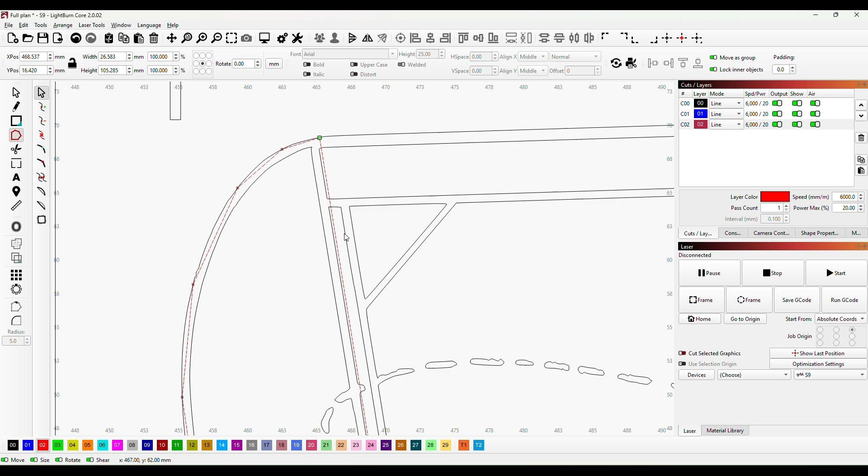And then if I zoom right in so I can get right on that end, and then when you left click, that finishes the shape. What I'll do is I'll just change that to layer number 2 so it comes out red so you can actually see what I'm doing. Now if I go to nodes, there's a few minor adjustments to make. This is not quite in line with the edge of the wingtip, so if I just move that node back, that snaps into place, and then if I go to the bottom, just check that that's in the right place.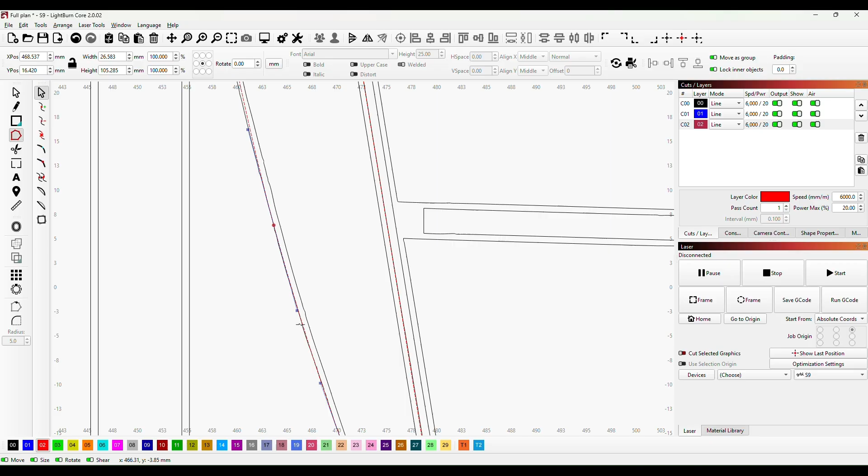Yep, that one's fine. So if I just hover on these, click on it, hover over it and press S, that will turn that into a smooth curved node. Now the bottom one here, we always need to adjust this one because it is still a corner node. So while the smooth curved node has followed more or less the path we want it to take, this one here we'll just have to grab this tag and bring it out a little until the dotted line follows where we want it to go, just like that. Okay, so just click on the rest, convert them to smooth curved nodes, and you'll see how they snap into place and then just seem to naturally follow the line around.

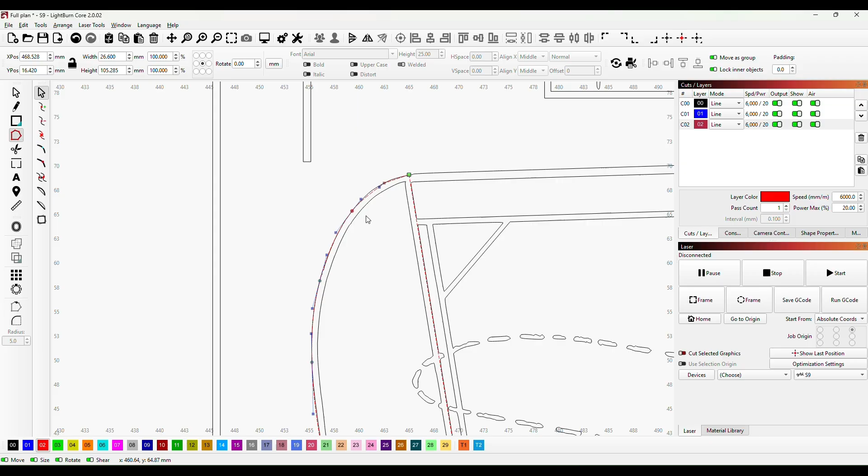Just like that, and we end up with this perfect shape. But there we go. Just convert that one, and I think that's going to be a very good shape. Let's have a little look. Perfect.

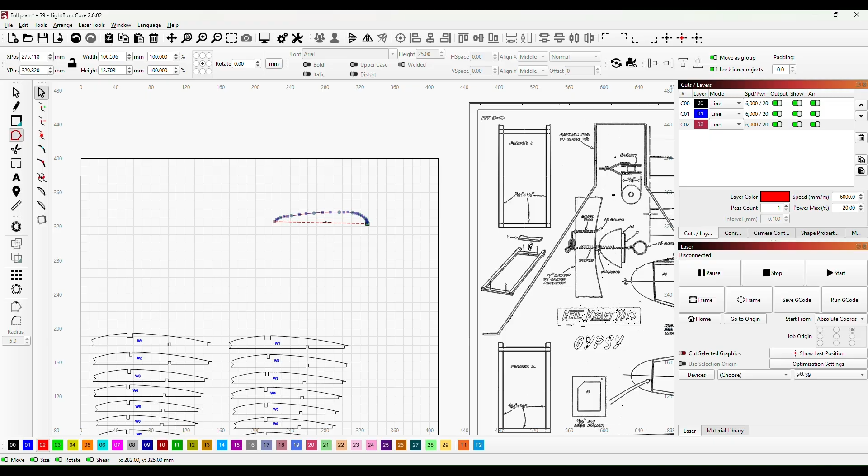Okay, so I just need 2 of those. So I'll just level that up. I'll just go to nodes, go onto that bottom line, press A, and that's now perfectly horizontal. So if I convert that to our cutting layer and then produce a copy, Control C, Control V, so I've now got 2 of those.

I could have labelled them up first actually. We'll just call them WT. Although I'm certain we'll all know that they are the wingtips, but there you go. Right, so just convert that to the engraving layer.

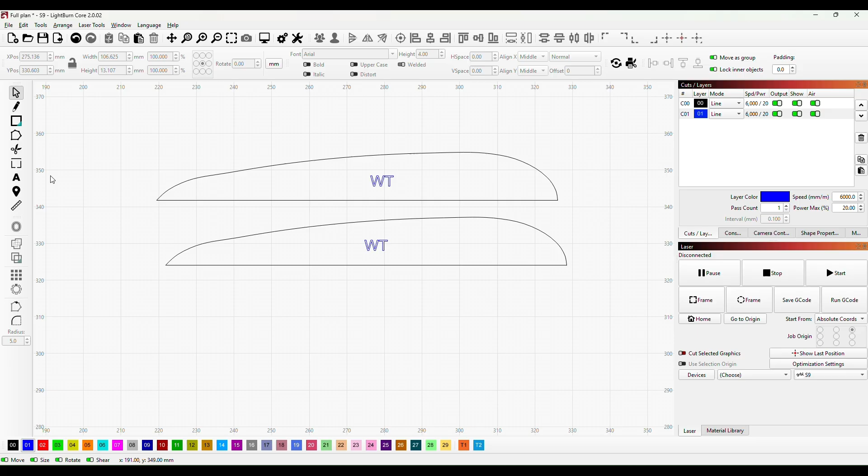Group, group, and I'll move those to a different sheet so that they're on the 3/16 balsa. I'll just put a couple of tabs in. And there we go. So that's the wing tips.

And now the last thing that I want to do on this video is produce these dihedrals. So I'm going to produce those now, and I'll show you how I do that. And then I'll be sending those to 1/16 ply rather than balsa. I just want to strengthen up this centre section slightly.

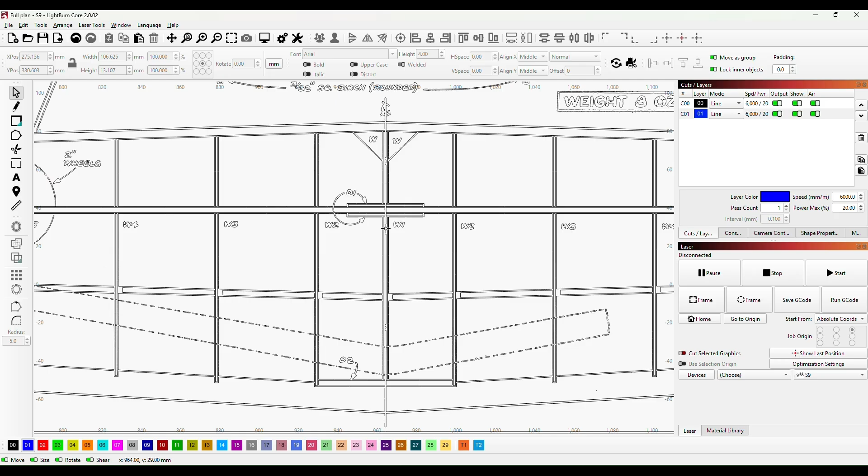So all I'm going to do with these, now these ones, remember, are 3/16 by 1/8 or 3/16 by 1/16. So I'm going to make those 4.8 millimeters deep and 1/16 or 1.6 millimeters wide. So the way I'm going to do that is I'm going to create a shape. I'll extend it to here, to be fair. I won't stop them there. I'll bring it to here.

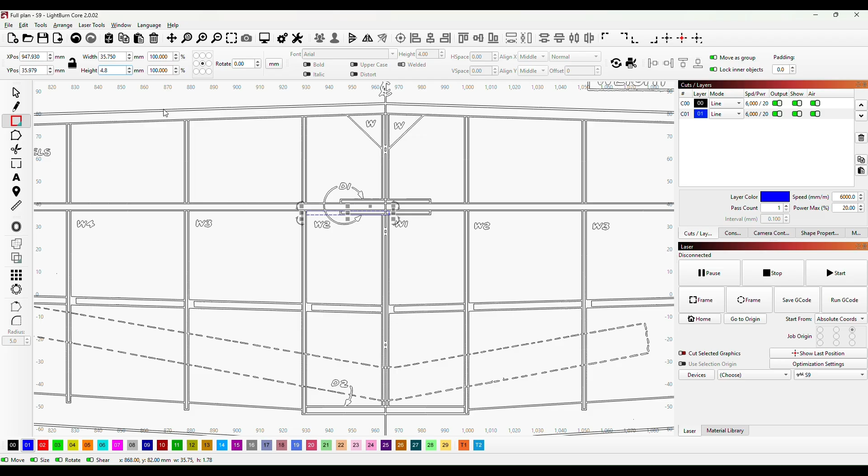So I want a shape that is that size, and that wants to be 4.8 millimeters high. So 4.8. Okay. Now what I'm going to do with that is I'm going to bring that down here, and I'm going to rotate that until I get that angle correct, until that angle matches this line,

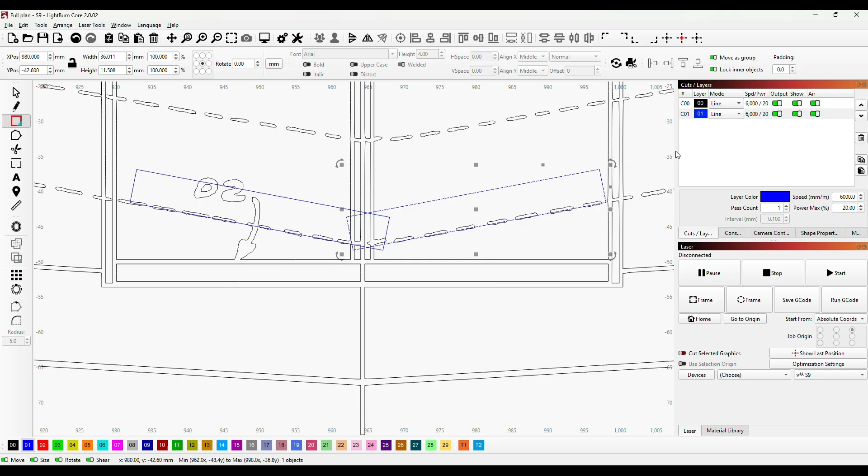just like that. And then what I'm going to do is I'm going to copy, Control C and then Control V to produce a copy, and I'm going to flip that round. Move that right on so that it's identically positioned to the one on the other side. So I think that's positioned correctly.

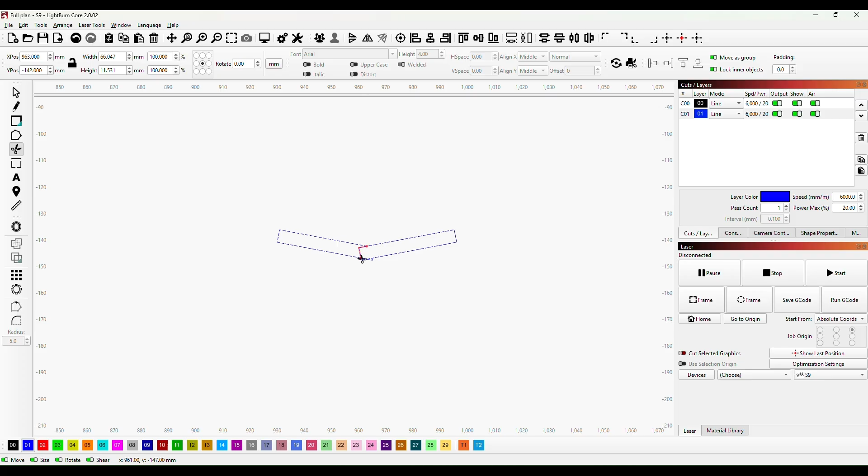So if I just Control and grab the other one as well, then what I can do is I can bring that into a nice little space just here, and then I can grab my snipping tool and just snip away the bits that we don't need, and I've now got perfectly shaped dihedral for the center part there.

What I'll do with that is I'll move that over to our workspace, and I will convert that to a cutting layer. Now I'm not going to engrave on this because I don't want to weaken this in any way. So what I'm going to do with this is I'm going to put D1 right above it there, no, right at the end there, I think.

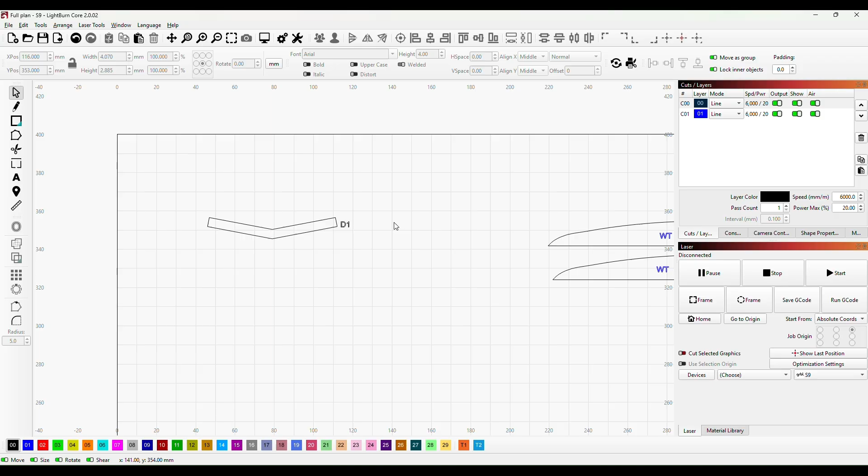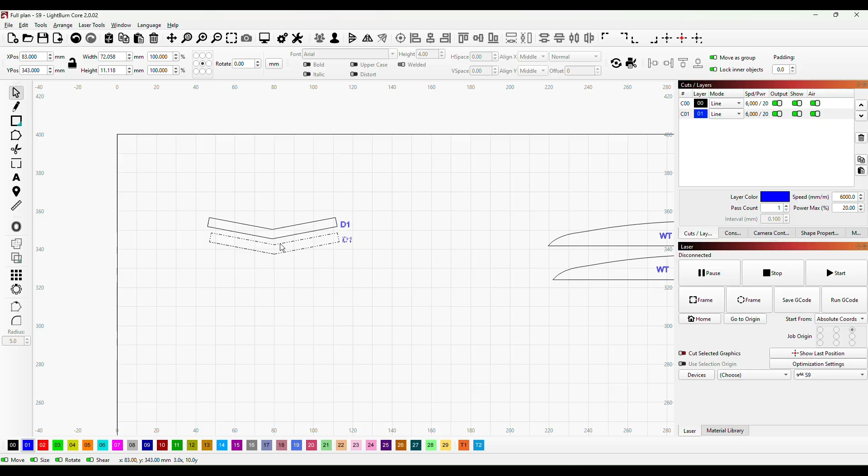And then what I'll be able to do is just change that to our engraving layer, and then I can group that, and then copy and paste. And then I've now got my two D1s, and I can put those both onto a sheet of 1.6 millimeter ply. Okay, so that's the D1, but we've now got our D2 to make, and I'm going to make that in exactly the same way as I've just made the D1, so no need to show that.

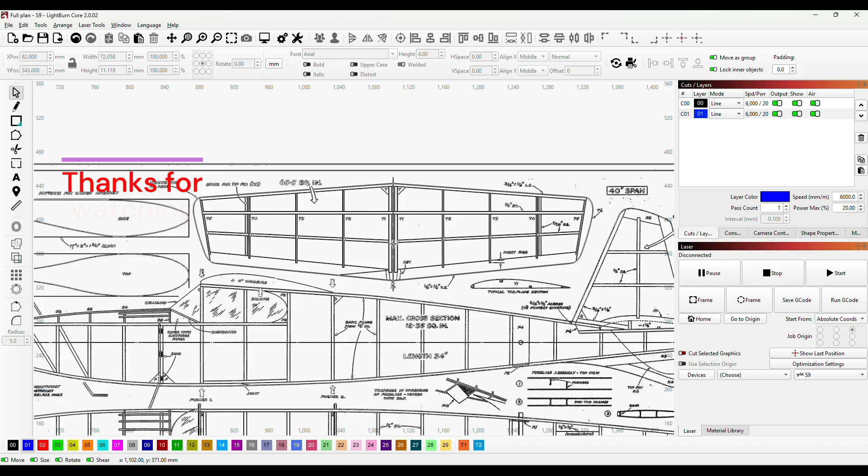What I'm going to do in the next video is I'm going to produce this tail plane here, and I'm going to save that for a complete video on its own because I'll be cutting in our elevator as well at the same time. So that's what I'll be doing next time.